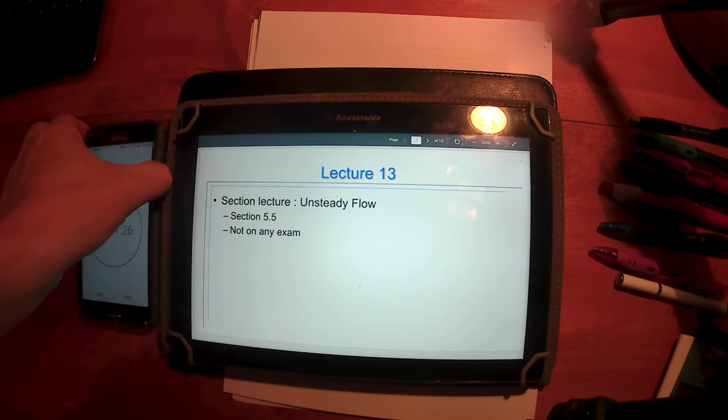Let's talk about where we're at now. So, the last few lectures talked about chapters 4 and 5. That's exam 2 material. Now there's the end of chapter 5 that, if you're following along in the textbook, you'll notice there's a section 5.5 that we haven't talked about yet.

That is unsteady flow. Unsteady flow I'm not going to put on any exam. It won't show up on this exam. It's not going to be a topic we have to worry about for exam 3. It's not going to be a topic for the final exam, even though the final is comprehensive. We're going to talk about it. Okay. It ties together pieces of both chapters 4 and 5. We're just going to kind of mention it and tidy up.

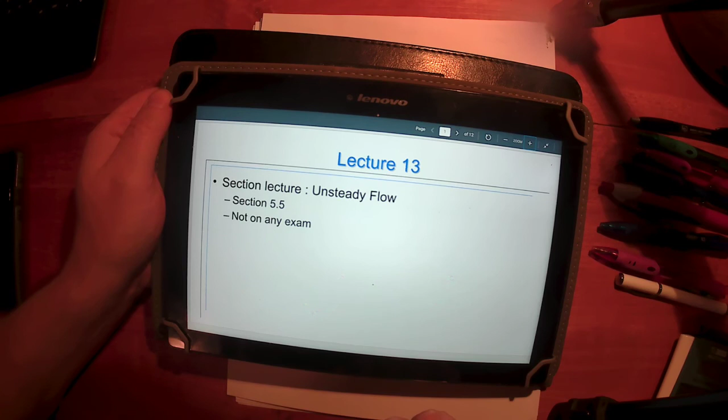It's kind of an optional topic I like to talk about when we talk about chapter 5 if we have time, and we are right on schedule and really a little bit early. I try to build a day like today in, especially in the summer, to give you guys a chance to work through that homework, really focus on it, not rush through it too much. Anyway, just give you an opportunity to not only work the homework, but additional problems like the homework, get some practice in. So this is a topic we can talk about, not on an exam, but I do think it's going to be helpful for you, okay?

By the way, I don't have PowerPoint here today. For some reason, these slides did not want to show up, so I'm just showing the preview through Canvas. My copy of PowerPoint on my tablet did not want to display the equations I have built in here. So, well, there's more than one way to do that, right? I know I could do a screencast, but anyway, this seems to work.

So here we are. We talk about unsteady flow, again, the end of chapter 5 in the Çengel and Boles text. Unsteady flow refers to this warm-up period or this cool-down period where, if you look at the conservation of energy and the conservation of mass, you have this change period, which normally with the control volume we say is 0. We normally worry about the steady flow condition where the dm/dt and the dE/dt both go to 0. Everything's constant with respect to time.

Here we're considering a situation where, before we reach that steady flow point, you've got to warm the system up. You've got to get everything spinning. You've got to fill it up, get it operating. Or after you shut everything off, everything's still going and spinning and it's got to cool down. So there's a period of time where the system itself, the device, is either warming up or cooling down, or it's filling up with mass or it's losing mass.

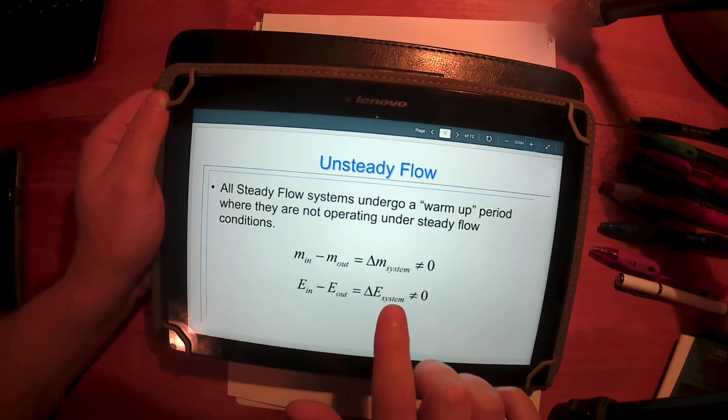So there's a period of time while the energy of the hose itself will decrease. We've talked about the specific heats and the internal energy change. So this quantifies the internal energy change of the garden hose itself. There's a period of time where the temperature of that garden hose, which is directly proportional to the internal energy of the garden hose, is decreasing. It's cooling down as the water flows through it. So there's a period of time when the garden hose, the system, is losing energy as that water flows through it. Okay? So this is the unsteady point in the operation.

Now after you've pushed water through this garden hose long enough, you'll get the same mass coming in as going out, and you'll get a point in time where the garden hose is no longer cooling off. The garden hose is already cooled off. And so you'll have that the energy in is equal to the energy out. The garden hose itself is not changing energy.

Now that doesn't mean you couldn't have heat in and mass coming in one end of the garden hose, and then coming out of the other end you have a higher temperature of the water, meaning the heat that goes in throughout the garden hose contributes to a temperature change in the water, but the garden hose itself, the system, doesn't change. So that gets pretty in-depth, but again, unsteady flow is this point in time where the system's either warming up or cooling down, or it's filling up with mass, or it's expending mass.

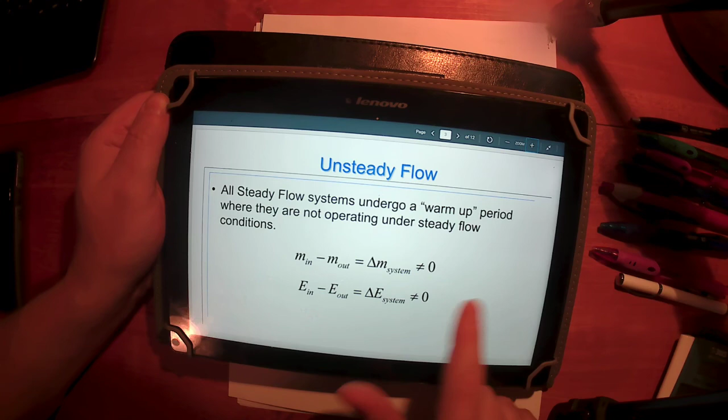So here's the thing. The examples of unsteady flow that we could point to don't typically operate in an unsteady fashion for an infinite amount of time. The garden hose example I gave you, you'll reach a steady flow point where the temperature of the garden hose remains constant, and the mass into the garden hose equals the mass out of the garden hose. So you do reach this steady flow point where the change is zero.

You could have a balloon where we're filling it up, or after you've filled the balloon up you let it go. Those are both unsteady situations, where I'm filling the balloon up, or I let it go and it just kind of shoots around the room. So what you have is three scenarios. If a system operates in an unsteady fashion too long, think about the balloon filling up. If I continue to fill that balloon up, I will reach the limit of that balloon and it will explode. That's one possibility.

Or it will exhaust. So if I let that balloon go after I've put air into it, it's operating in an unsteady situation in the opposite direction, and it'll hit a point where it's exhausted all of its potential energy, right? So eventually, three scenarios: it's either going to blow up, it's going to exhaust itself, or it will reach a steady flow condition like the garden hose, where if you can maintain constant input conditions over a long enough period of time, it's feasible you'll reach a steady flow condition.

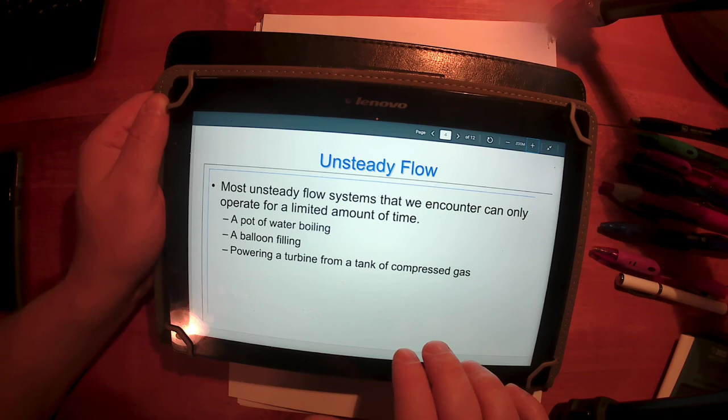Again, these are examples of unsteady flow, but these are not normally what we will encounter. Normally we'll encounter the situation where we have steady flow. We want to maintain it so long as we can maintain the inlet conditions. But if we do consider unsteady flow, we have to understand both the first law of thermo and the conservation of mass become differential equations.

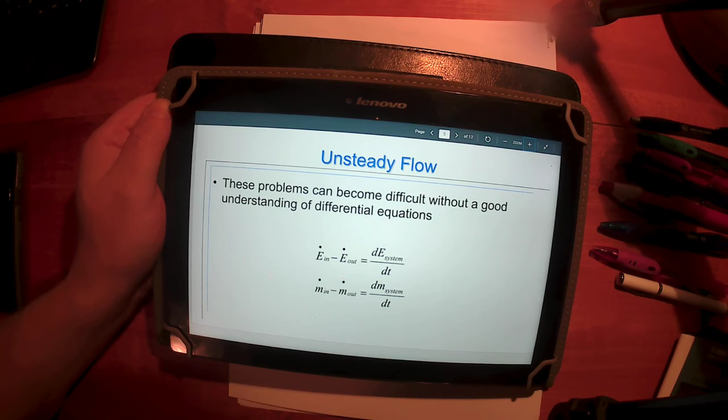And as I've said multiple times, I'm not expecting you to have an in-depth understanding of differential equations, but that doesn't mean we can't have a basic understanding of them. Hopefully we talked maybe a little bit in the calculus class about differentials, and that's okay. If not, we'll do a little bit here. Even if you've had diffy Q, I don't expect you to have a lot of understanding of them.

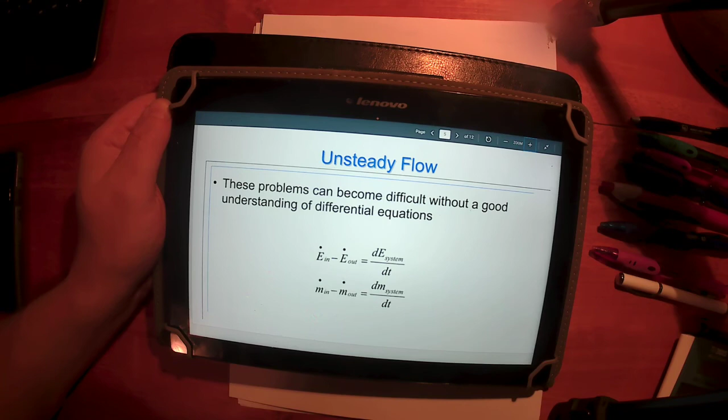Here's what we're going to do. Kind of like we did with steady flow control volumes, we said, look, we can just assume this goes to 0. We're not going to assume it goes to 0, but there is another simplification we can employ. We can employ what we call uniform flow.

Uniform flow means that we assume that the rate of mass entering or leaving the system is constant for a very short period of time. The change in energy is constant over a very short period of time. And the properties of that mass as it enters or leaves the system are constant for a short period of time.

Another example I like to point to is the aerosol cans that we use to clean electronics. I wish I had one here and I could spray it for you and show you. Any kind of aerosol can, any kind of can that you would spray, is an example of an unsteady flow situation. So you push that valve open, you get it to spray, and if you hold it open for a really long period of time, what happens?

Alright, so again, if I hold that can open for a long period of time, eventually that can gets cold, right? Because the contents inside the can are expanding. As the stuff gets propelled out of the can, the remaining mass expands into that vacated area. And because it's expanding, it's doing work, so to speak, it's losing energy, it's going to a lower energy state, and so it gets cold.

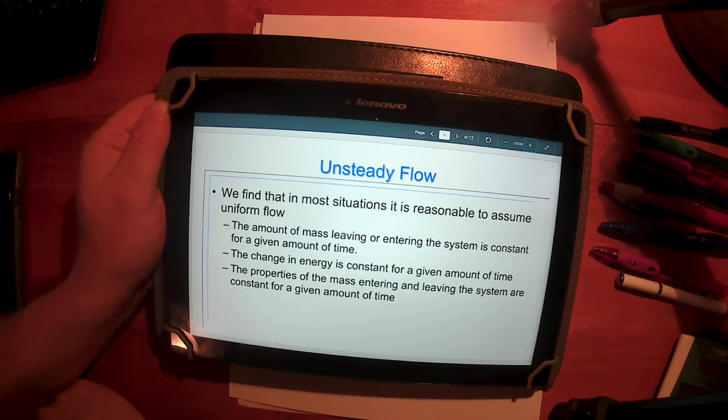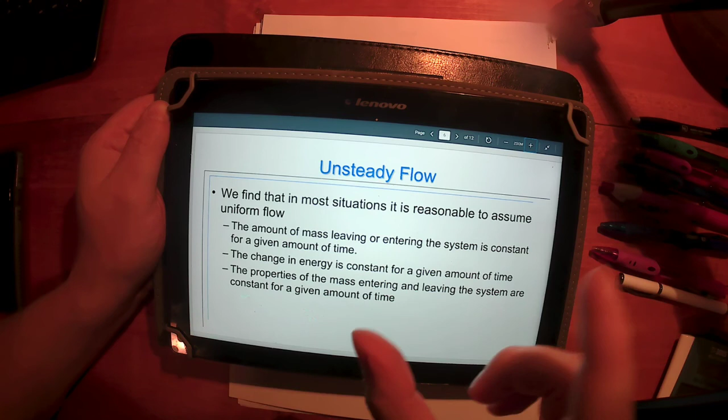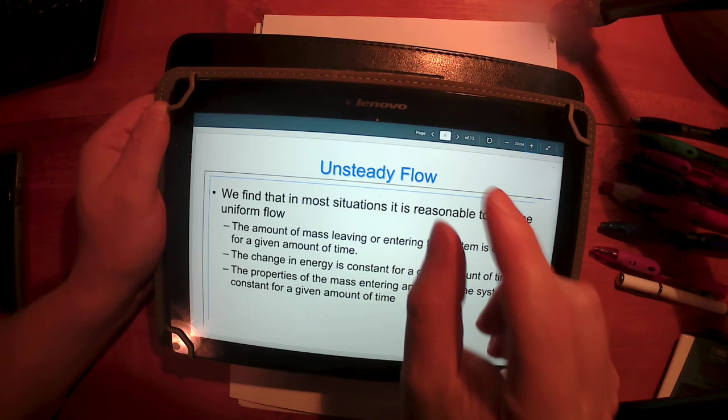So what we're saying here with uniform flow is we're not going to worry about a can or a system that's operating for a really long period of time. Think about that aerosol can if I just squeeze it and then let it go. Just a quick spray, and another quick spray, over a very short period of time. The properties of the contents of the can are pretty constant. Now, leave that can open for a long period of time, and that's a different story. Those properties do change.

But if we just talk about a very short period of time, spray, spray, spray, these are reasonable assumptions. If I hold that can open for a long period of time, eventually the mass will start to slow down. But for just a short period of time, the rate of mass coming out is going to be pretty constant. The energy change is going to be pretty constant, and properties of that mass coming out are going to be pretty constant.

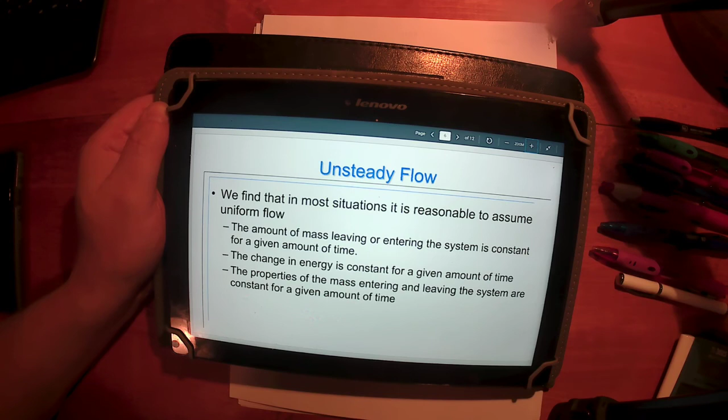So if we do that, instead of dealing with differential size slices of time, let's worry about a quantifiably small slice of time, a delta t. A very short delta t instead of a differential. And that's going to be a small energy change instead of a differential size energy change. So let's approximate these dE/dt's and dm/dt's as deltas.

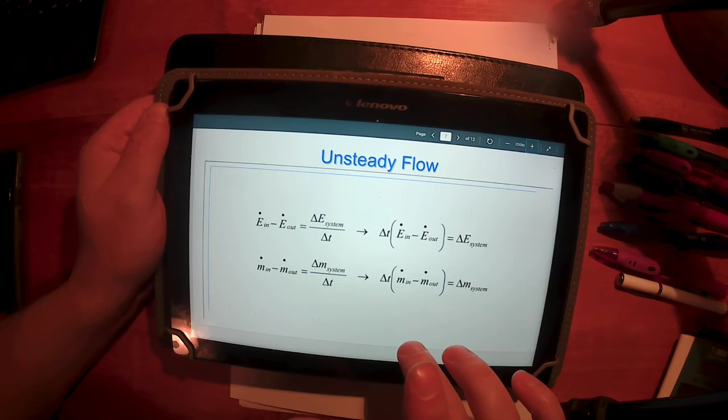And then I can just move this delta t over to the other side of the equation. Then I just take my rates, multiply by the amount of time over which it occurs, and that gives me the energy change for the system, and the same thing with the mass of the system. Okay? So here's an example.

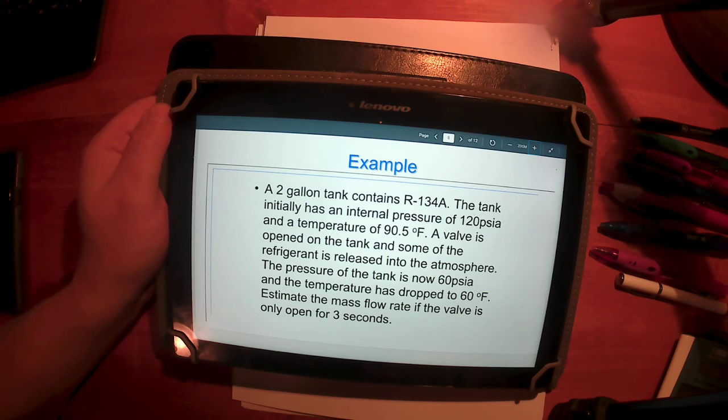I thought we could work through an example real quick of this. How am I on time? Oh, this is not a bad place at all to stop. So I'm going to stop here, and we'll see how far into this example we can get, how many videos that takes. Okay? All right, we'll be back in a second.